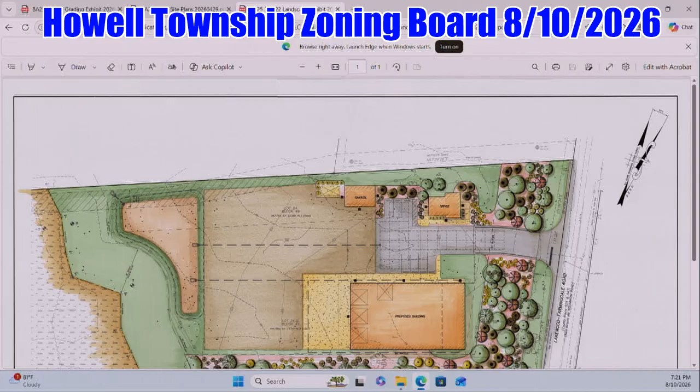Okay, well, let's get everybody sworn in. Were you sworn in the previous? No. Oh, got it. Oh, and we have a traffic engineer, I forgot all about him, sorry. Oh, don't forget him. What happened to the first application? You got to pay attention. What about our client? Is he on this one too? Yeah. John, I want to clear up the camera. Traffic engineer's not here for this one. Okay. All right.

Do you swear the testimony you give will be the truth, the whole truth, nothing but the truth? Yes. State your names for the record, spell your last. Anthony Donatiello. I am the civil engineer. My license is in good standing. Christine Cofone, licensed professional planner. John Haugh, H-A-U-G-H. I'm the owner. Okay, thank you.

Anthony, for the record, would you place your credentials on the record in a little more detail, please? Yes, I've been working as a civil engineer. That's a mic. Okay, I didn't know that, thank you. I have been working in the engineering field since 2018. I officially got my license last year. But I've been at Lindstrom, Diesner & Carr since 2021 doing engineering design. Okay, have you testified before any boards before? Yes. Okay, we accept your credentials, thank you.

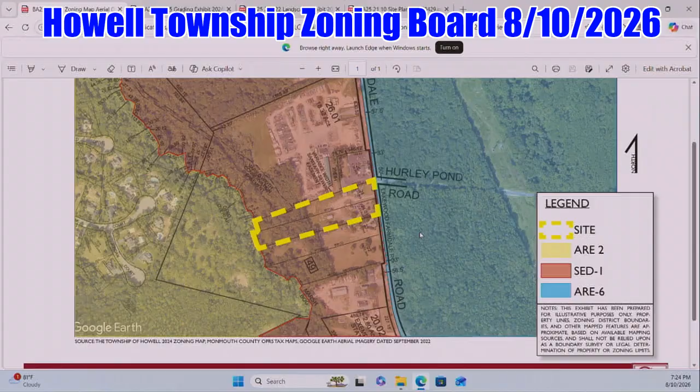Thank you. And I see we have a copy of the site plan that's posted on the board. Would you run through for the board where this property is located and what's currently located on the property? Yeah, so the property has two addresses, 207 and 209 Squankum Road. It's also Lakewood Farmingdale Road, and it's a county route. So as you can see, it's actually at the intersection with Hurley Pond Road there. Right where that dashed yellow line is, that's our site.

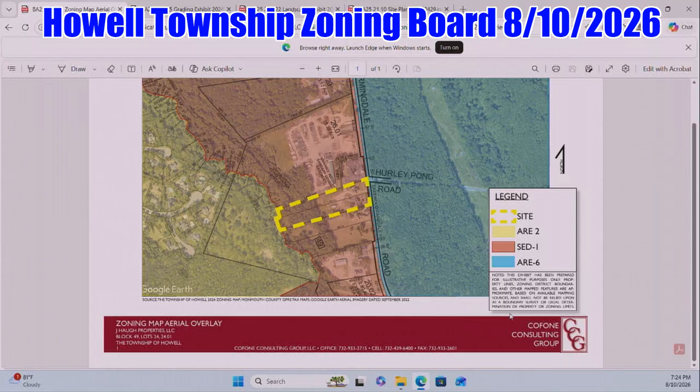And as Mr. Alfieri explained a little bit before, we are demoing one of the existing houses that's on the property. If we could bring up the demolition plan. So on the bottom lot there's existing dwellings, an existing garage, an existing shed structure there. All of those structures are being removed as part of this. That's where our proposed building is going. The structures at the top lot, we're proposing to keep those structures.

So the structures at the top up here, we are keeping those, and then you've got the garage here, there's a shed, and then this dwelling, that's all being removed. Okay. And the structure you're keeping on the upper lot, let's say, you're converting it from a residence to an office, correct? Okay, thank you.

So let's move on to the site plan and provide testimony describing in more detail now what's being proposed exactly. As is being said, the existing structure up here is a dwelling right now. It is being converted to office space solely. And then the garage that's there is going to stay a garage. And then we're proposing the building down here. That building is 8,400 square feet total. It will have about 1,680 square feet of office space, and then the rest of it, 6,720 square feet, will be storage for the crane vehicles.

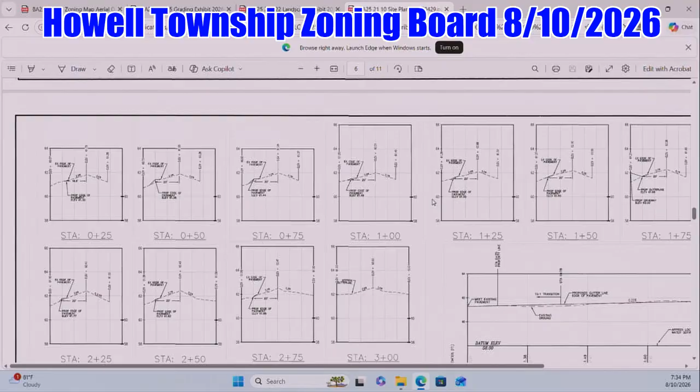Yes, and we've coordinated with Charlie on this buffer, so there's a lot of landscaping in the buffer to meet the buffer requirements all along the property here, the side to this residential property, and along the front. And then there's some landscaping back here where the parking spaces are, because this is the bar over here. I want to make sure any lighting, like if cars are out there at night, their headlights won't be an issue with the bar.

And what about parking lot lighting? Where is that proposed? There's a lighting plan. So most of their use is really going to be around these buildings, so we have the lighting on the buildings here. Back here where they're storing the property, they don't necessarily need that lighting because of their uses.

The next expert will describe the hours of operation and the use a little better, but they don't need the lighting really in the back of the property, they need the lighting in the front here, which is why we provide lighting in the front. I believe we have a design waiver actually for the lighting because we have no lighting in the back here.

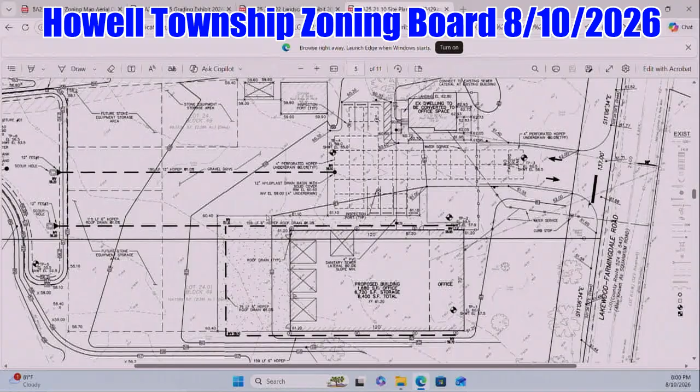Sal, would a year be enough time to get the balance of the work done, or do you need more? From the time you get your temporary CO in the office to the time to commence phase two, how much time do you need? I don't know. I would have given you a year for commencement. So would a year be enough for commencement? What does that mean? Starting phase two? So we have a year to do phase one, and then we could start phase two? No, when phase one is done, then the clock starts. Then the clock starts, okay.

Could I ask for longer? Could I ask for 18 months? I would say that's probably pushing it for commencement. That would be good for completion.

Okay. And it's from the time you get the CO for the office. Yeah, that's going to take you time. And then that'll be phase two, and then they want to do everything after that. Unless you think there's a reason you need to break it into three phases. No, really, at that point, phase one is all the site work. Right. That's a lot of the work. The next thing is just saving up money for the building. The building and the foundation, so.

Okay. Yeah, I guess we could try to do it in a year. Okay, and if not, we'll have to come back and explain to the board. I think that's fair. So, okay, you're going to complete phase one, the stormwater, the new building, the concrete pad, and the landscaping. That'll be TCO for the office space. And then within a year from that, you'll start phase two, and then you have a year from then to complete phase two? Is that what we're saying?

Yeah. Okay. I think the concrete pad would be part of phase two? Yes. Yeah, for the building, so the foundation for the building, the concrete pad, right? You're talking about the apron to get into the building? No, I mean, the apron would become... How about this? How about, if you guys are comfortable, we work out a solid phasing schedule if the board acts in the affirmative, understanding the ultimate goal is to not have this languish indefinitely, but to make sure it's actually realistic, because I don't want him having to come back multiple times for a variety of reasons. And then if Charlie's office is comfortable with the phasing, he would sign off on it as resolution compliance.

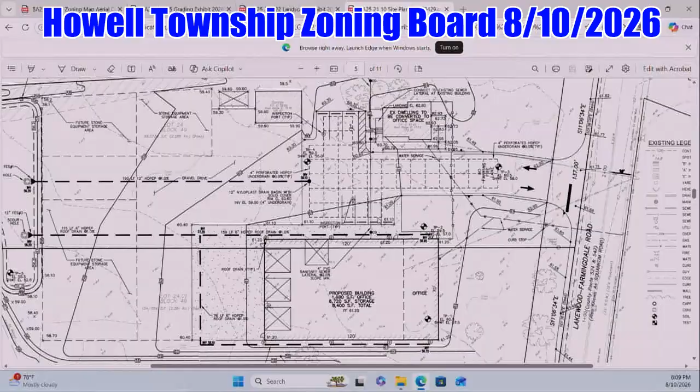I think that we could probably work out, I mean, the landscaping is pretty significant. I would suggest that, Anthony, you attempt to place it where you think would be the least disturbance of your implementation of your plan, and submit it to Charlie and me to review. But the goal is, I don't care if it's on the property line, especially on the south where you have all that landscaping, or you want to put it on the inside of that landscaping. Then you probably won't even see it, but it will still provide the security you want, but it's up to you.

Now, there is a current fence there on my property line with Northeast Remsco. Could I just continue it from their fence? Because that looks like where my property line is, and then just go forward. That's fine. So I would just suggest when you're doing any revisions, assuming that the board acts in the affirmative, you include that fence. And just to confirm, you said up to Remsco?

Yeah, because the back, you have the basin, which has the retaining wall, and there's a pretty sizable amount of distance there in the back of the property. So I would take this to two, figure out a way to tie them in, and then I would just do the two property lines. I would think the neighbors want it too. Yeah, you just want to make sure your stuff is secure. I agree, people are not going to walk off with it, but you also don't need people playing on it either. That was my point, then you're getting into liability. Yeah, I agree. I got you. I think that's a good idea. Okay.

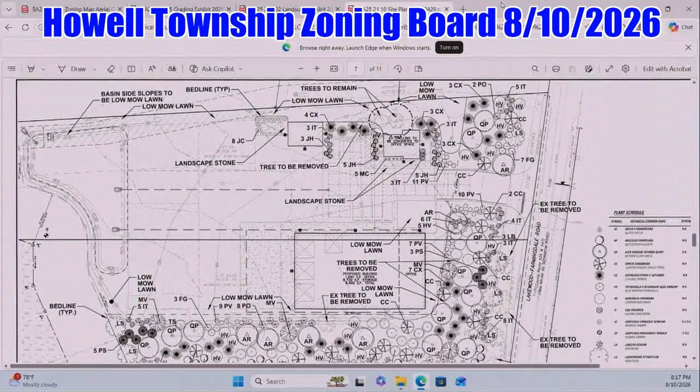That's all we have from the plan. Okay, I'm good. Nope. I think, just looking at the landscaping proposed alone, it's a substantial improvement. And it's a great new business. It's not super intense in terms of people and what have you. And I think it's in the right area of town.

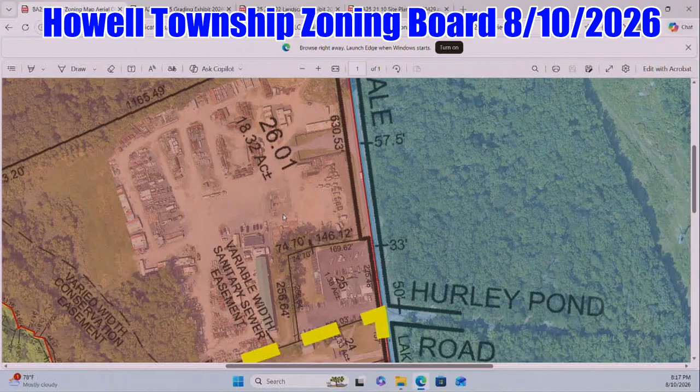Okay. You're almost a little over 4 minutes. Okay. Yeah, I was a little repetitive on the negative criteria, but I was making my point.

Anyway, since there's no more questions, I'd like a motion to open to the public. Motion to open to the public. Anne Marie with the motion. Second by Mr. Ryan, all in favor? Aye. The Chairman has opened the hearing up for members of the public to ask questions or comment on this application. If you'd like to speak, please come up to the podium. You will need to provide your name and address, and you will be sworn in.

Check 1, 2. Yep. Good evening, sir. Good evening. You swear the testimony you'll give will be the truth, the whole truth, nothing but the truth? I do. Spell your last name, please. Perry Mastrola, Mastrola, 250 Bennett Road. Thank you, sir. Just a couple of quick things on this one. You guys did a good job with the overview. Good evening, Mr. Chairman, board members, professionals. I hope everybody's doing well.

I heard testimony about that stone area in the back not having cranes or equipment. That should go in the resolution, because you'll have no control. If your code enforcement has to go there for any reason and that's not in the resolution, he has no fight there. So he could park big cranes, hydraulic equipment, various items on that stone, and I don't see any plan for the hydraulic oils going into that detention basin. Yeah, we agree that all the testimony offered will be incorporated in the resolution. Do we know about mechanical work at the location? No mechanical work. Right, because I've seen it before. I have a property near me where they park cranes and hydraulic equipment right on the wetlands, and nobody does anything because it's not in the resolution.

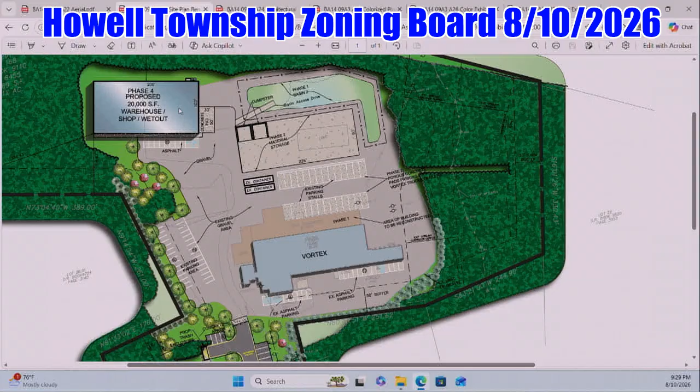You answered previously that it's just Vortex. Right, that's what I heard. That's who's going to be using it, but I don't think we'd want to restrict that because you don't know what's going to happen in the future. So we'd rather have that as possibly warehouse use. That's a different thing. That's a whole other ballgame. Restricted to that? Yeah, I think you should focus on what you know, and then if something happens in the future, you come back. We'll come back. It'll be Vortex, the same user for both.

And then just want to clarify with the septic, Mr. O'Donnell touched on that. So the existing septic that's there, it's a representation that it's adequately sized for Phase 1 and the expansion, correct? For Phase 1 only. And then for Phase 2, it'll be expanded to accommodate the flex space and whatever bathroom facilities may be in that supplemental wet-out building, correct? Yeah, Phase 2, the septic will be sized for the entire site. Gotcha. So they're not coming back and expanding the field again? No, do it once. Okay.

All right, and then the last thing, I apologize, because I don't know if the fire official knew there was going to be the gate there at the transition, it just has to have a Knox box. We'll provide a Knox box for the fire company.

So one of the things, and Sal, I don't expect an answer from you currently, but you are way over on both impervious and building coverage. But leave the building coverage as an aside, you're way over on the impervious coverage, like 3 acres over what we permit. And you're like almost triple the number of parking spaces that we require. So I'm going to request that you take a look at that and cut some of those parking spaces down and get that coverage back to a reasonable number. Okay, we'll have to look at that. Okay.

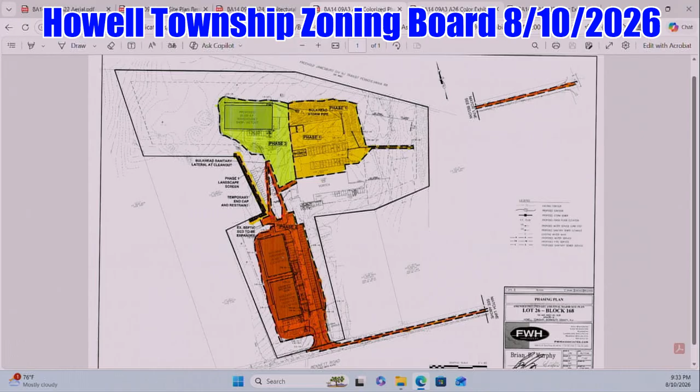Thank you very much. And Mike, you submitted elevations, both black and white and color? Yes, there are color elevations. All right, you want to start with the front flex buildings? Is that what those depict? Yeah, we can go back to the black and white page, PB1, right there. So this is the 16,000 square foot flex building. The building is subdivided in this image into 4 tenant spaces, approximately 4,000 square feet each.

We have an office space designated there, which will be under 20% of the tenant area. Typically, we do these buildings for the uses that we indicated earlier, electricians, plumbers, HVAC contractors. The individual tenant would typically drive their work vehicle in, sometimes unload, keep storage inside the space, and then have a small office with a bathroom for each one of the tenant spaces. Most of the access is through the bottom of the page, which is the east elevation.

And at the top of the page, you see man doors going out the rear, which are primarily for egress purposes. The building will be a non-combustible building, not sprinklered. These 2 buildings will be constructed out of a cast-in-place concrete panel with a steel roof. The concrete panels on the exterior, if we just scroll down a little bit, please.

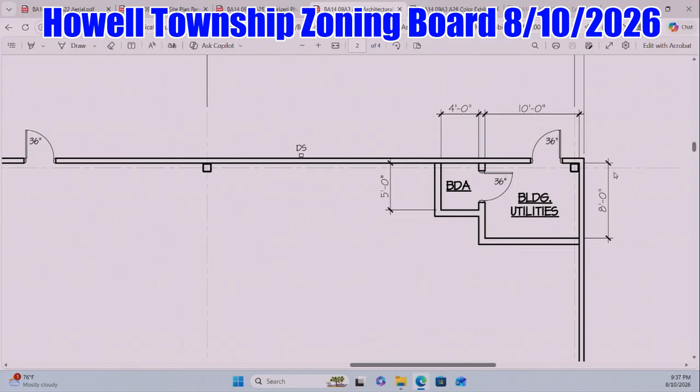In the top right-hand corner, we have a utility closet, or utility room, and we're basically anticipating a BDA. That is for fire communication services. When you start to get larger buildings in a more rural area, the signal might be sparse, and a special signaling system has to be installed.

So we preempt that when we design it to have a space so that way when they come through for the final testing for the fire department, if it is needed, it's constructed and it's not an interruption to the whole process. If it isn't needed, then it's just basically a closet for the tenant space. Again, these buildings will not be sprinklered. They're under the square footage area for sprinkling. And we are assuming this to be either a non-combustible building or a heavy timber type construction.

It's going to be a sloping roof with a ridge. The ridge on this building is 28 feet 6.5 inches, high point. The high point, or the top of parapet for buildings 1 and 2 was 32 feet. So we stayed within the required height limit. And again, this will be used as a continuance of the existing occupancy in the other building as far as wet out, storage materials, which you pretty much see in the existing building right now.

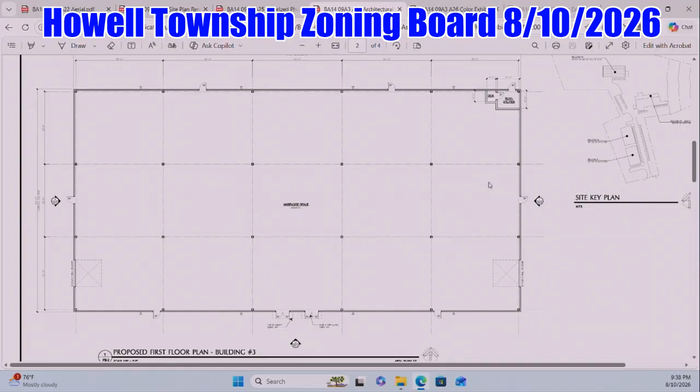The building will consist of corrugated metal panels, entrance canopies, a cultured stone base, and it being earth tones to blend in with the natural environment surrounding it. This building is located at the rearmost point on the site and the least visual of all the buildings.

So we require all 4 facades of all the buildings on site, regardless of where they're located, to have the same treatment. So, you know, there needs to be more vertical breaks in this building on all the facades.

And just as a follow-up, there's a little bit of a conflict, because I know Mr. Murphy said that we're going to comply with all the requirements or recommendations in the Fire Bureau's memo, and one of his recommendations is that all buildings need to be fire suppressed, and you're saying that the buildings per building code don't need to be fire suppressed. So has anyone met with the fire official to discuss that discrepancy?

Well, the building code stipulates whether the buildings need to be suppressed or not. The buildings are not... The question was, did you meet with the fire official? No, I did not meet with the fire official. I didn't see it necessary. I went through the building code. I mean, I will say that everyone that comes to this board, there's an expectation that they meet with both the Environmental Commission and the fire department before they come in. Okay. So I have to tell you, I can't see this board granting a use variance for this project when the fire department wants the building sprinkled.

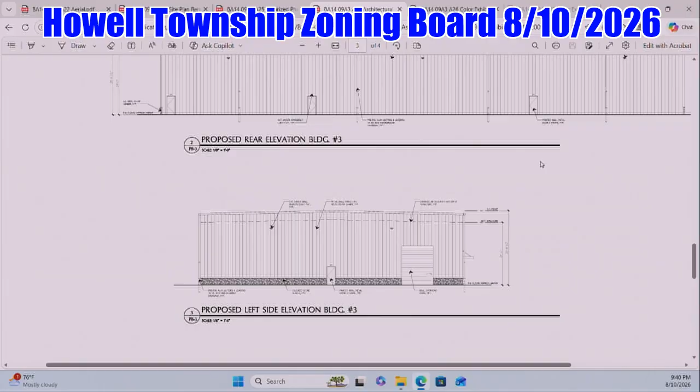Understood. And then we have the existing building, the reconstruction of the existing building. If you could scroll down to PB4, please. You can see the odd shape of the building. That is the actual footprint of the building. I field measured this area myself with one of my staff members. We're basically reconstructing the building on the existing foundations. The concrete slab is in very poor condition, I guess, for being exposed to the elements for a period of time, so we'll be pouring a new concrete slab in there.

But this will just be, again, a continuation of the existing adjacent use. To the right side, you see a large overhead door where they'll be bringing vehicles in with a man door. They'll be storing materials in here, and I guess a continuance of the wet process that they do in the building adjacent to this space. So again, this is an existing area on the site that we measured, and we're just going to reconstruct walls on top of it and tie it in for drainage.

And again, we will work with the fire department as far as fire suppression for this building as well. The existing building is occupied, it is not sprinklered, but under a reconstruction for the building code, I'm assuming he's going to want this as well. So we'll address that with the fire marshal.

I think you just need to meet the fire official. This building's different because it does have that 360-degree circulation around it, but the wet out space and then the 2 flex, it's just a drive aisle, and there's just grass or gravel around the perimeter, and it's not 30-foot circulation, so. We have no issue with that. That's not a problem. We will meet with him and we will resolve that issue. And again, we're going to be looking for something more on the architecture on this building, too. Okay.

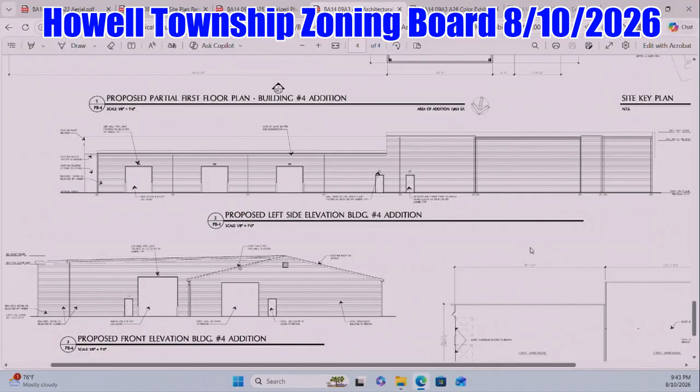Board members, any questions before we go to the next? Got a question. So the flex space, if a tenant took 2 spaces or even took the whole building, within the building, can they transverse from, we'll call it from space to space? Can they just, within the building, go, if it was one tenant?

Correct. There might not even be demising walls between the tenants. If somebody comes in before we construct it, or even after they construct it, they could take down one of those demising walls and take 2 spaces, take 3 spaces. So the flexibility is there for them to expand or contract their business over time. Okay, so it's not, okay. But you're just showing 4. We're just showing you the maximum occupants in the building, and a logical setup of how that building could be broken up.

Or it could be one building, but it's easier for the board members to see it if it was broken up. Don't we have limitations on that? 7,500, I thought, am I wrong? Yeah, so flex space, where it is a conditional use, there are restrictions on minimum loading requirements per each space and maximum size of the building. I guess is it the applicant's representation, Sal, that they can carve it up, or they want to reserve the right to have one tenant in each building or one tenant occupy both buildings? We don't know the answer to that.

We do. When you look at the flex space conditional use standards, for example, they can't exceed 45,000 square feet in building area, which our buildings don't equal combined. But it says 60% too. Or 60%. So I would suggest that you seek relief from that requirement, because in the event that you do have a single tenant in each of those buildings, you wouldn't have to come back to secure that tenant. Correct. And the loading docks we talked about, there are no loading docks, so that section doesn't apply.

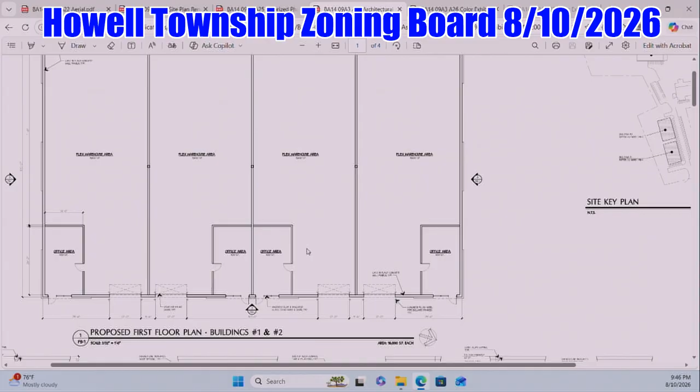Flex space as opposed to warehouse, does our ordinance prohibit distribution or define distribution? There are eight conditions associated with flex that would not be applicable to warehouse. It doesn't talk about distribution, but it limits the size and the maximum height of the building, and I think, Mr. Testa, you did testify that it would comply with the 32-foot height, correct? Yes, ma'am. So the warehouse buildings going up now are 48, 49, 50 plus, so the size, height, and even the design, I don't think would lend itself to a traditional warehouse building, correct?

Agreed. Okay. And when we get to planning eventually, we're not going to have a distribution use. There's a whole list of SED1 uses that we'll discuss, and many of them we're going to exclude because they just won't fit on a site such as this. Thank you.

Okay, Sal, do you want to get Mr. Rea up? If so, we can, please. Yes, thank you very much. Thanks, Mike. This is currently zoned as ARE 6, correct?

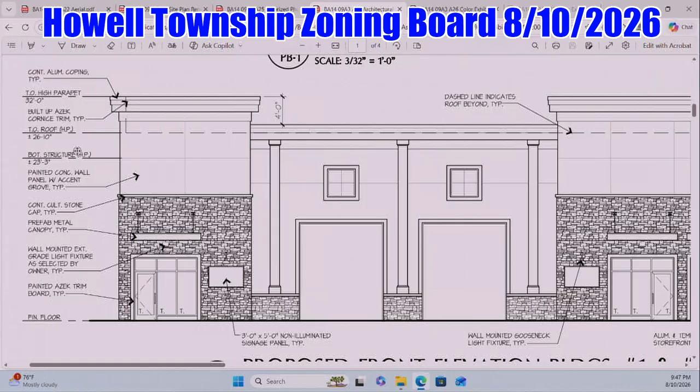John, you've been sworn in already, and I know you've testified before 5,000 boards in the past, but can you just briefly put your credentials on record, please? John Rea, R-E-A, a principal with McDonough and Rea Associates, a traffic engineering firm, 1431 Lakewood Road, Manasquan, New Jersey. I'm a licensed professional engineer, 50 years experience in the traffic engineering field. Thank you, Mr. Rea. We accept your qualifications. I've been here before. And John, you prepared a traffic impact analysis? I did. Would you summarize the findings, please?

Yes. We prepared a traffic impact analysis, last revised March 4th, 2026. Essentially, we prepared a full traffic impact analysis. We conducted peak hour traffic counts at the intersection of Bennett Road and Fairfield Road, which is just to the east of the subject property. From that data, we obtained the peak hour traffic volumes passing the site frontage on Bennett Road, and the turning movements at Bennett and Fairfield. We prepared estimates of traffic to be generated by the buildings based upon Institute of Transportation Engineers data, and I'm going to circle back to that after my testimony, because there was a comment in Mr.

Cunliffe's report regarding the traffic generation estimates that I used. But we prepared estimates of traffic generation for the different buildings. We projected traffic volumes to a design year of 2028 after reviewing the NJDOT's background traffic growth rate data for the area, but we expanded that as well.

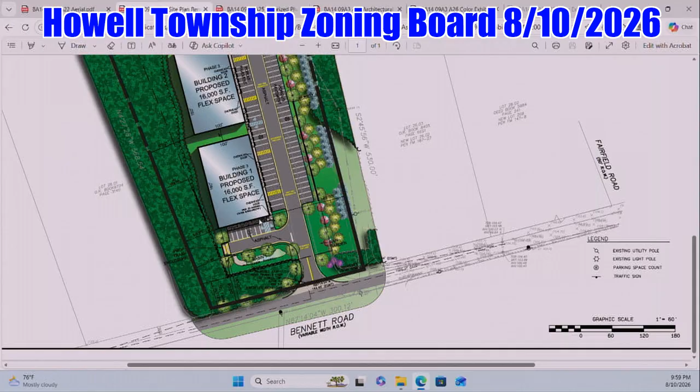And what's the time period there? The morning peak hour, we did the counts between 7 and 9:30 in the morning and 3:30 and 6 in the afternoon. So about 2.5 hours. Yeah, and the actual peak hours, I can tell you when they occurred. I just have to get to the sheets in the back. The morning peak hour occurred between 7:30 and 8:30, the afternoon peak hour between 4:30 and 5:30. Okay, so about an hour then.

Yeah, well, we do the traffic analysis based on the highest one-hour flow of traffic during the morning and afternoon in order to ensure a worst-case scenario, and we assume that our peak hour traffic coincides with the peak hours on the street. Right, okay. All right, thank you, Mr. Rea. Anybody else?

Okay, Sal, seeing the time, will everybody be able to come back when we carry? Yeah, and I think there's one person from the public. Yeah, I was going to get to him. And then we just have to pick a date that we have enough time. So maybe, if anybody from the public wants to question. Okay, let's do that then. Is anybody here in the public that would like to question? Okay, just for questions of the witnesses that have testified. But it can't be anything on the planner. Planners haven't testified yet.

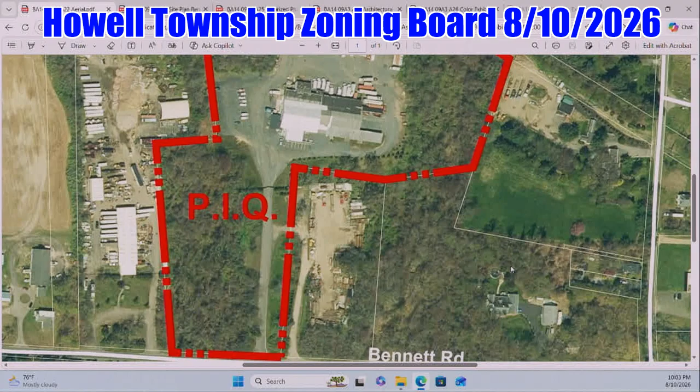What is the load range of this road? What's the weight limit of this road? That's not anything a traffic engineer would be aware of. Well, you should know if you can run trucks on there, right? If trucks are running on it right now, and they're not prohibited from running on it, that's a township concern.

It's a 4-ton road, but I'm not sure it is. It might be, now, I haven't heard anybody say anything about semi-trucks. If it's a 4-ton road, it's got to be enforced. It's 4 tons, yeah. So you're going to have trucks that are heavier than that, right? And they're not going to turn right, they're going to be going down to Fairfield. Yeah, they're going to go left right in front of my house, right?

They made it sound like there's only residents on this side, but there's residents on the other side. Correct. Okay, well, they didn't bring that up. I didn't hear it. Oh, you just did. Well, that's your job too, right? So, your driveway, Bennett Road is not a wide road. Anybody drive on Bennett? Yeah.

It's not wide. I want to know how they're going to turn a tractor trailer out of this driveway and not rip up the road, and actually then turn onto Fairfield, which most tractor trailers can't make the turn. So, explain that to me. Well, it's my understanding that tractor trailers are already going into and out of the Vortex site, so they're there. It's happening today. Right, and I watched them try to make the turn on Fairfield.

They can't make it. They have to cut across to the opposite lane to make the turn. So it's not really conducive to truck traffic. There's no light there. There's nothing that makes it good for trucks. Well, the only thing I would point out is that the additional buildings that are being constructed are not going to generate tractor-trailer traffic. They're going to be contractor-type trucks. So whatever is there now in terms of tractor-trailers will continue to be there, but there won't be any more.